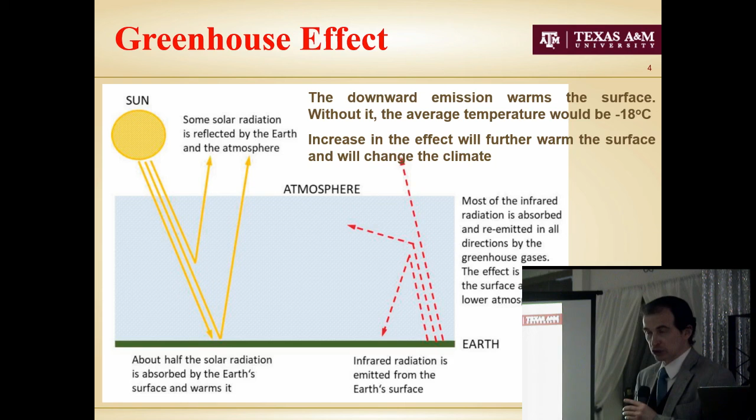Let me begin with the definition of global warming and global challenge. It turns out that global warming and greenhouse effects do have a positive effect on all of us. We wouldn't be able to survive on this planet, at least not comfortably, if the effect weren't present. So we're certainly thankful for that, and not being at minus 18 degrees C without it. At the same time, considering the population and energy demand, we won't be able to survive much longer if temperature is affected significantly.

That said, based on international agreements, and the Paris Agreement in particular, the plan is to try to limit the increase in greenhouse gas emissions and temperature effects, staying below 2 degrees C, maybe at about 1.5 degrees C, and take it as a challenge to look at technologies that might deliver on that promise in the short term, not in the next 100 years, but sooner.

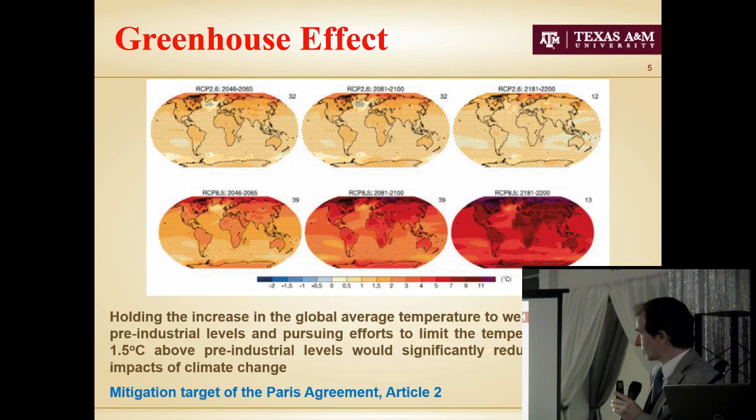That brings consideration of conventional approaches, and that brings nuclear into the picture. There are a couple of things to be said about nuclear and greenhouse gas emissions. Certainly it has promise, and it has some challenges to be addressed, which is why people consider next generation nuclear reactors.

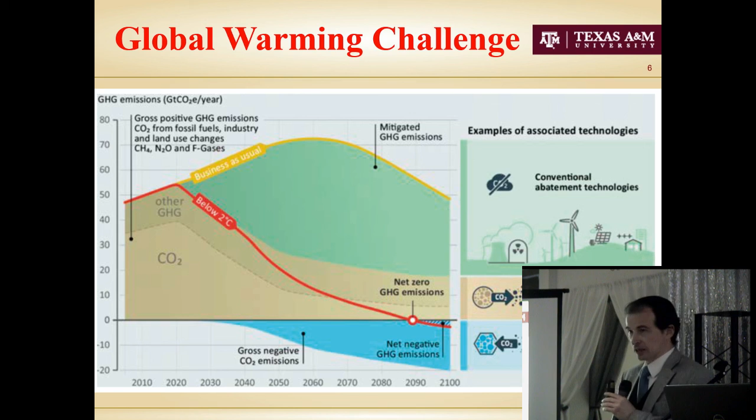There are emerging carbon removal technologies of various kinds, with the idea that a combination of emerging energy technologies and nuclear, still new - we haven't been around for centuries, but already not that new anymore - can help. Properly operating nuclear power plants don't release much, or shouldn't be releasing much, into the atmosphere.

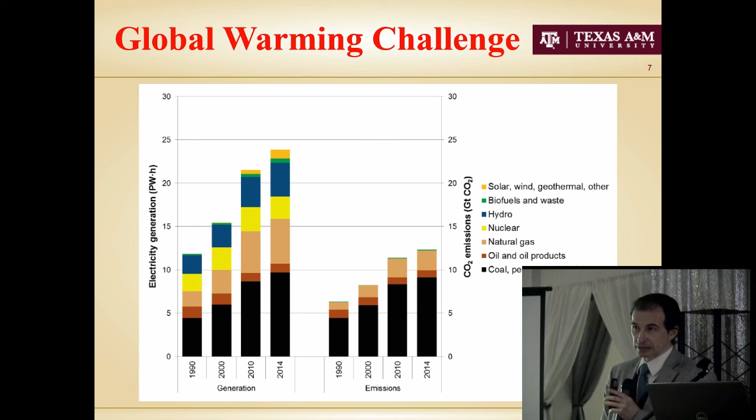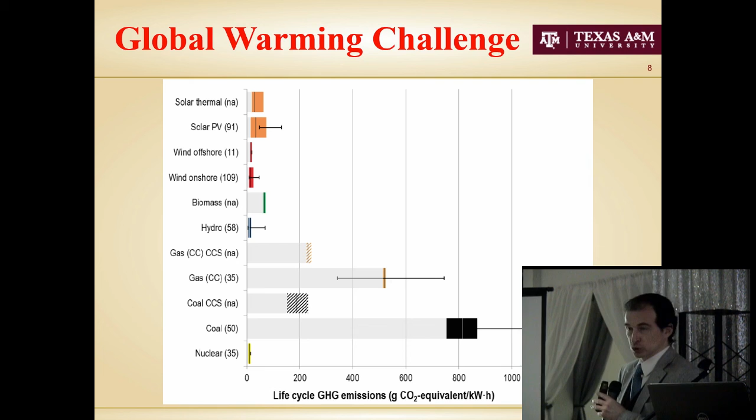That said, I looked at what the actual numbers are like, and indeed nuclear does come across - and I'll talk a little more skeptically about this in the next slides - as a rather clean and environmentally benign technology. That's what originally brought me to nuclear a while back, looking at advanced energy sources that can run sustainably without much need for anything else for it to run.

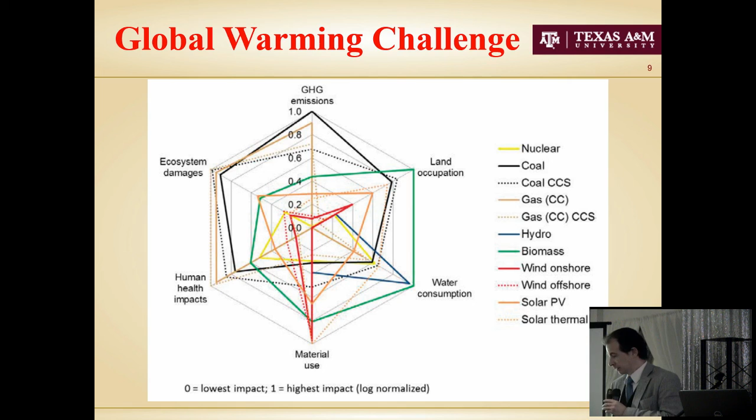When we compare human health effects, land and water consumption, and ecosystem damages, a properly operating nuclear power plant comes across as very, very attractive in that case. It comes nearly completely benign in terms of what it's emitting and what it requires for operation.

That said, in the middle, the nuclear power plant itself doesn't emit greenhouse gases, and it takes work to manufacture fuel for a nuclear reactor. After the fuel spends time in the reactor and produces energy, and we get electricity out of it, certainly those components do contribute greenhouse gases, because most of those systems are designed with conventional resources and conventional technology, and most were designed 20, 30, maybe 40 years ago. That's part of the consideration behind next generation nuclear power plants and their next generation interactions with the environment - they don't look quite like what plants look like today.

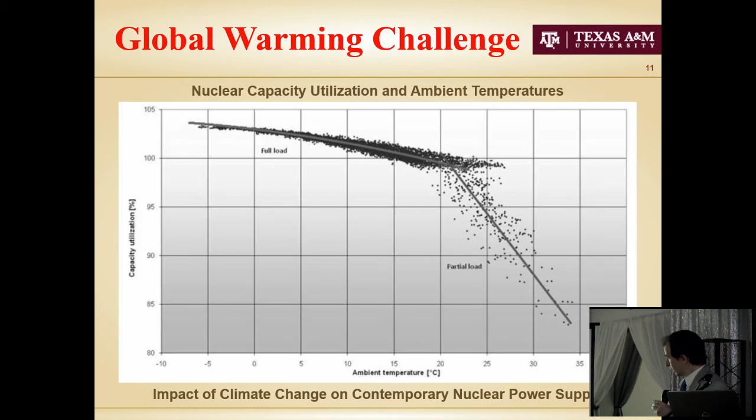It's possible and conceivable that a nuclear power plant designed relying on an aquatic system may, in the long run, with environmental conditions changing, end up in desert conditions and not be able to reject heat the way the plant was originally designed. So that's certainly something to consider, and it's a factor in designing plants.

We can make it environmentally friendly, environmentally benign. We can address challenges like traces of greenhouse gas emissions and the nuclear industry's reliance on aquatic systems for heat rejection. The second one, fusion, is still trying to catch up - it's certainly not yet in the engineering domain, and I'll come back to that in a few slides.

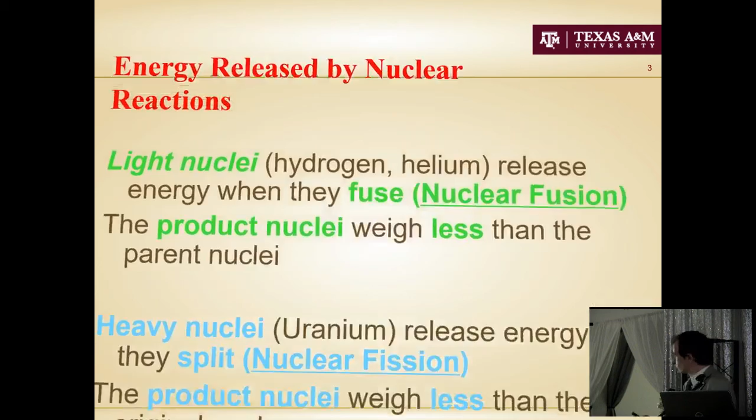I wasn't sure how familiar you guys are with nuclear power, but that's basically the general idea: you introduce elementary nuclear particles, make heavy nuclides split apart, and that fortunately produces a quite large amount of nuclear energy. The advantage is it's a high energy density power source, and as a result it can be very, very compact.

Also, because there is no oxygen consumption, it's completely autonomous. If I know how to control it, I certainly can design a system entirely autonomous to the environment, and that's what makes it quite applicable for space applications, for example.

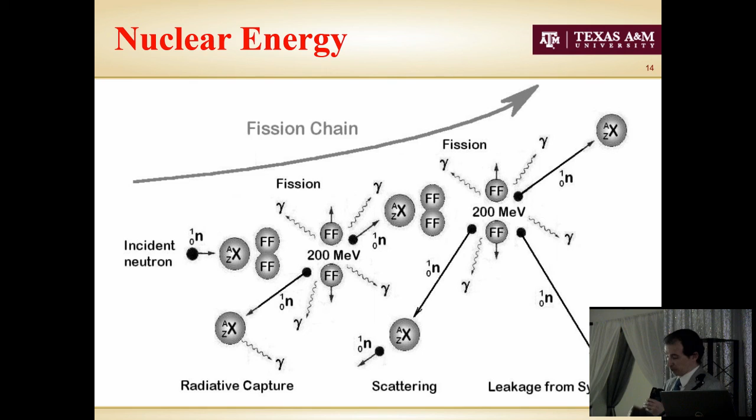We come up with nuclear energy as a very advanced energy - there hasn't been anything like it in past centuries. At the same time, charged particles produced in nuclear reactions do carry electricity directly. They can be harvested, but it's difficult, and we don't do that. That would be very efficient, but engineering is difficult.

We also might be able to take advantage of secondary effects that happen after we split the nucleus, and we also don't do that for exactly the same reason - it's difficult engineering, I wouldn't say prohibitive, but we're just not there yet. It requires more materials research.

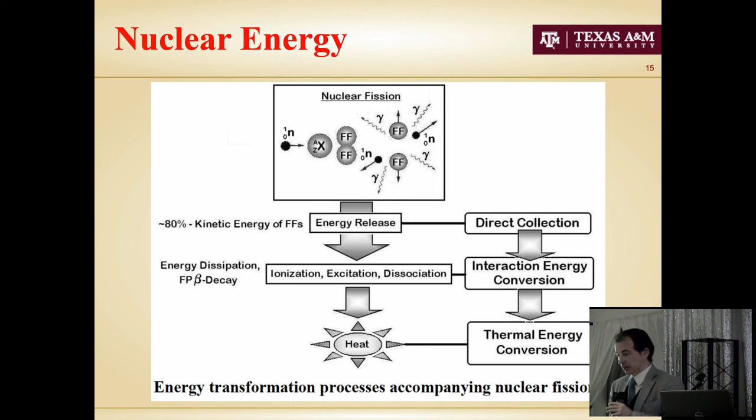So what we figured out to do reliably, and everybody does it, is take advantage of the heat of energy generation coming from nuclear, and then use that heat as a conventional heat source. As such it works pretty well, but like any thermal energy heat source, it's limited by Carnot efficiency. It requires heat rejection systems, and current power plants, about 30% efficient, need to reject a significant amount into the environment.

And even so, we're not releasing greenhouse gases, but we are certainly thermal polluters in terms of effects on the environment. But the advantages again are a high density energy source, autonomous energy source, providing quite significant amount of energy from a very small amount of fuel. It's not a chemical reaction, it doesn't require oxygen for operation, and can operate for a very long time without refueling.

As an example, research reactors - Texas A&M has 2 of them - run on the same fuel for a very long time. We have one megawatt reactor that runs for about 40 years on the same fuel. We also have a 5-watt reactor, a small one, that will never run out of fuel. Even though the power output is very small, it's remarkable that the system will always operate for a considerable amount of time without any requirement to resupply fuel.

So that's pretty unique. Certainly because of the autonomy of operation, not needing oxygen or anything else except fuel, that's quite attractive. From an engineering standpoint, it's a highly regulated industry. We certainly felt the accidents that occurred at 3 Mile Island, Chernobyl, and Fukushima most recently. We learn from accidents like every other industry, and we certainly would like to make sure this is not going to happen again, at least not the way it already happened.

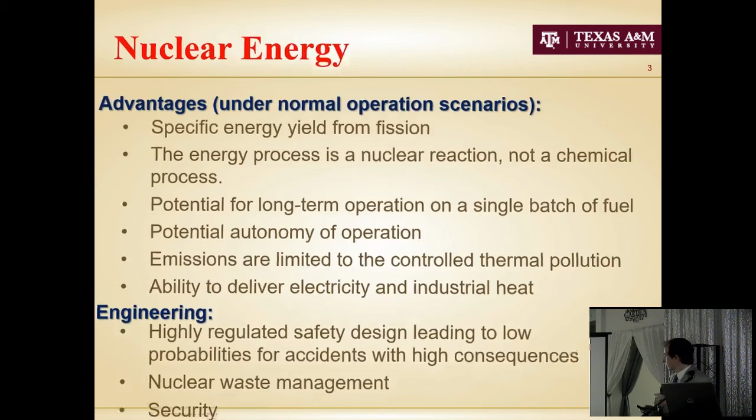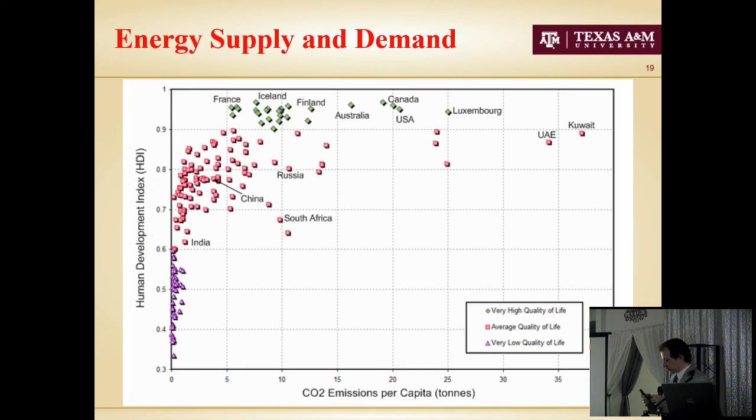Population is growing, and energy demand is growing, and as a result, we do see nuclear as one of the potential solutions in the energy mix. Certainly not by itself alone, but as part of an energy mix, it certainly looks quite helpful.

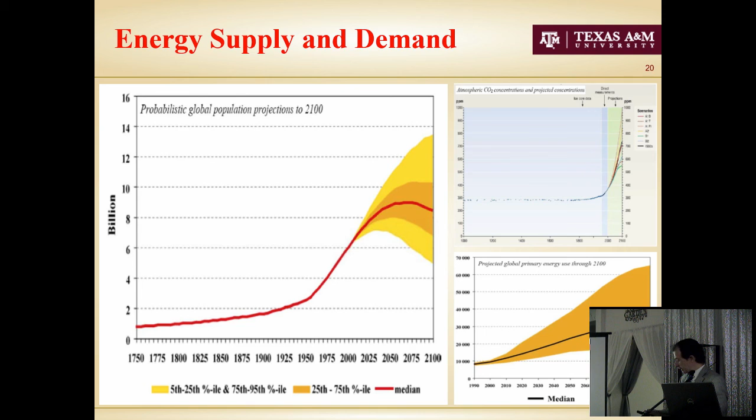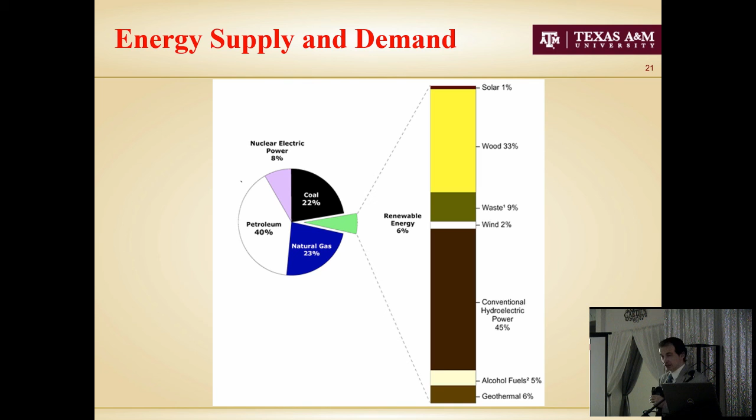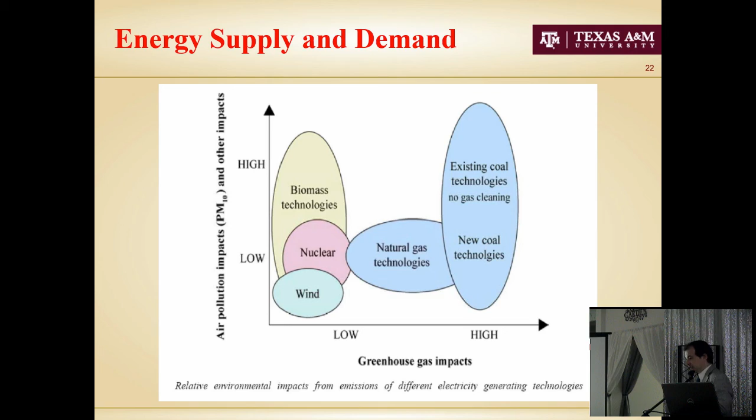If we look at the energy breakdown, nuclear worldwide is about 8%, roughly, depending on the literature source, reference source, about 8% globally. And it's certainly supplemented by renewables, which would allow minimizing emissions, and we are on the cleaner side. Even with those disclaimers, we certainly are on a dramatically cleaner side compared to alternative, conventional energy sources.

The second component, and that's why I want to finish this talk on the sustainability aspect a little later, is about how much fuel we actually have. Before my time, people were quite worried about running out of fossil fuel, conventional fuel resources. Knowing how much fuel is required to sustain nuclear power is an important consideration, because you don't want to have an energy source like this and then 200 years from now declare there's no more fuel for nuclear power plants. It's certainly a commitment for a very long time.

So according to estimates, and they're just estimates, for conventional nuclear power, cheap fuel resources are certainly limited. As we move to next generation power plant and reactor designs, the numbers grow dramatically, going into thousands of years. We essentially become a sustainable energy source at that point. Nuclear is one of the unique energy sources, being non-renewable in principle, but capable of producing fuel for itself, and while producing fuel for itself, also taking care of nuclear waste, because what we consider nuclear waste today actually would become sustainable nuclear fuel in the future.

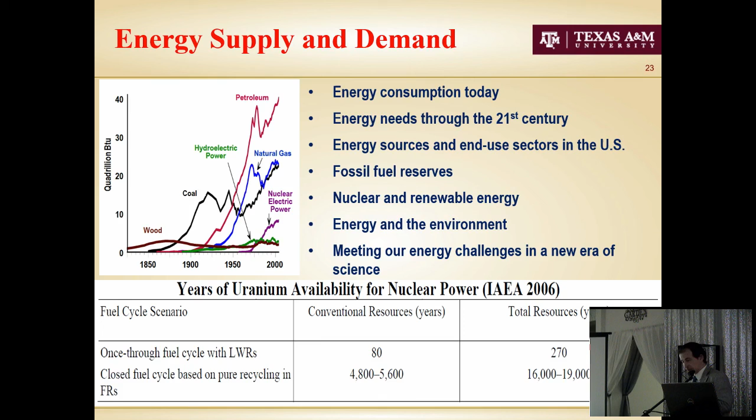So focusing on nuclear power, and again making our way slowly towards Generation 4 systems and talking about those. I already mentioned basic advantages, probably four of them worth mentioning most of the time. A properly designed nuclear power plant is environmentally friendly. Certainly from an energy independence and national security standpoint, it's quite an attractive energy source, and there's resource availability there. I just showed you the numbers, but there are concerns about proliferation, safety, and waste management, considerations meant to be addressed by next generation, what we call Generation 4, systems.

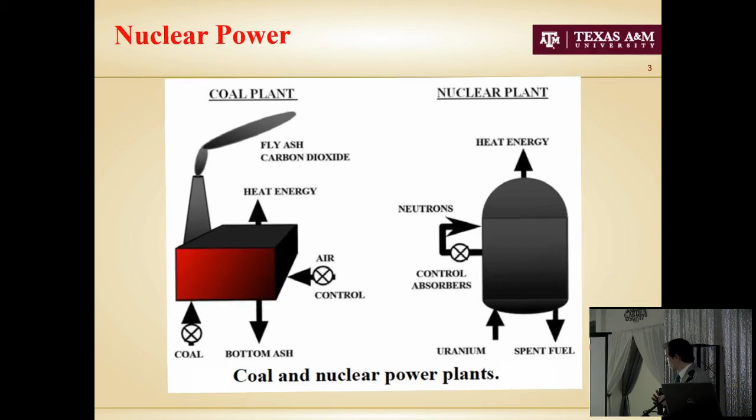To emphasize autonomy, I thought I'd compare a coal plant and a nuclear plant. From the nuclear side, we can run without refueling for quite some time. The current idea is to design nuclear reactors for applications that wouldn't require, or wouldn't be in a condition to receive, supply, wouldn't need a lot of maintenance, but would be able to provide energy autonomously. You need a little bit of uranium, and you'll eventually produce spent fuel as you use that uranium and get energy out of it. But besides heat and electricity, there isn't much else that's needed or emitted by that plant.

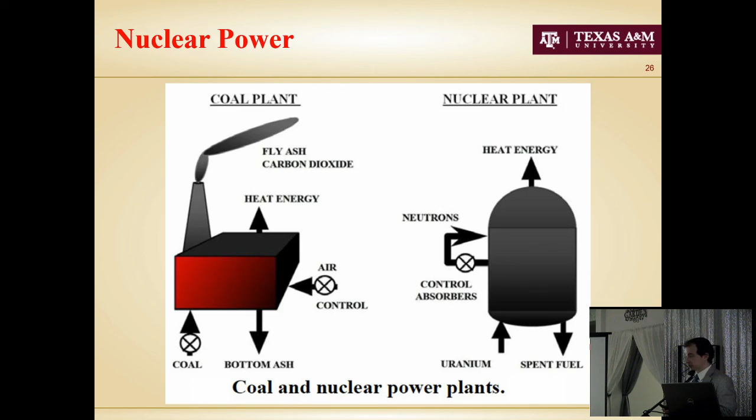Looking at the numbers, at how many nuclear power plants and reactors we have globally, it looks pretty interesting. Being a young industry, a very complex industry, we like these numbers. We like to recognize that we have 450 units in operation globally. That's 11% of all electricity from an energy source like this. It's certainly quite remarkable.

Domestically, we have 98 units at this point. There are a couple of units shut down for a variety of reasons, economics at this point—it's a subject for a different talk—but we're still producing 20% of domestic electricity, and we do have 2 new builds coming up, which is good news for the nuclear industry. Outside, nuclear is quite popular: there are 61 units under construction and 149 planned, mostly in the Middle East and Asia.

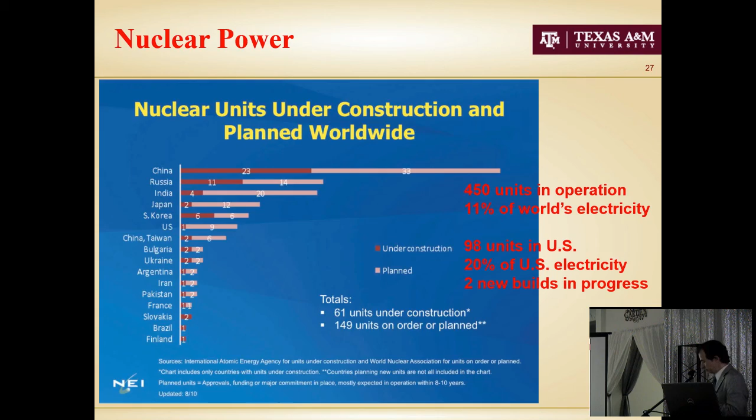Out of that, 2 kinds of reactors emerged. One that can boil water in itself and can run without a steam generator. And the second one, which is more popular today, needs a steam generator to produce steam and ultimately produce electricity. Those are boiling water reactors and what we call pressurized water reactors.

Canadians, because they didn't want what we call a fuel cycle and produce fuel with high content of certain nuclides, decided to go with a natural composition, and they came up with what they call the CANDU reactor. The CANDU reactor runs on natural composition of uranium. That reactor would be a third kind because it uses heavy water compared to light water.

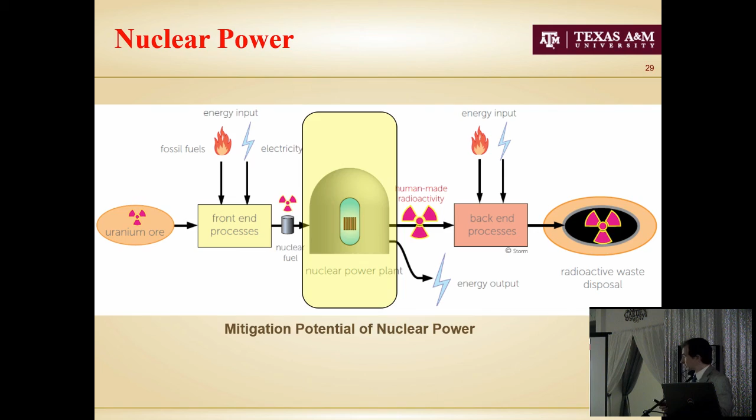Trying to address what I showed before, trying to address the rest of the fuel cycle, make sure there is no nuclear waste outside of the nuclear power plant, and the power plant takes care of that automatically. So the goals for Generation 4 systems: sustainability is one, and sustainability includes environmental aspects to that. It's assumed that a nuclear reactor would be capable of taking care of nuclear waste.

Safety and reliability, economics, security and proliferation resistance, making sure that the reactor is, by design, secure, and we don't need to worry about either safety or security of the system. So those are the goals behind thinking that we need to go beyond what current technology actually represents.

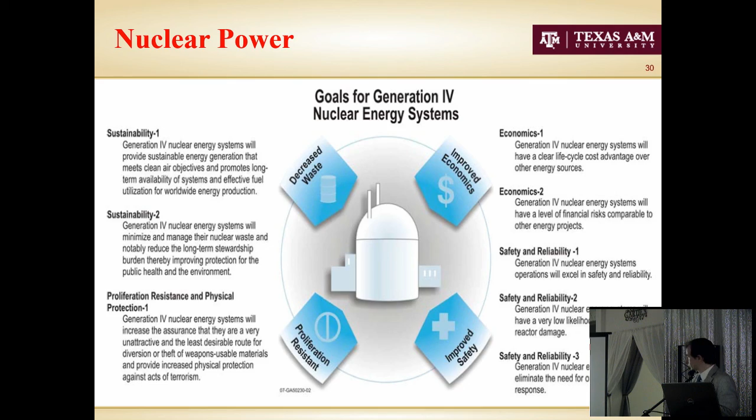Gen 4 systems comprise 6 different reactor technologies. Every one of them has a commercial vendor pursuing the technology. Most of them, what we call fast reactors, use high energy particles compared to thermal reactors that use low energy particles. So the gas fast reactor uses gas as a coolant, gas being helium.

The very high temperature reactor is a version of a gas reactor, but instead of high energy particles, it uses graphite, and the environment uses low energy particles as a result. But the coolant is still helium.

The third one is targeted by 2026, but realistically we're thinking it will come online by 2030 for the purposes of testing different materials. Then sodium obviously is not a very friendly material when it comes to interaction with atmosphere, with oxygen. So the reactor that doesn't have that issue uses liquid lead as a coolant.

The last one, grown to be most popular in the last 3 years, is the molten salt reactor. So all of these 5 reactors above molten salt reactors use solid fuel. They look like a conventional system with conventional solid components. As a result, situations that happened before when we talk about core melting accidents, core damage, and things like that, are certainly in theory possible. But the last one is essentially a bucket with liquid fuel.

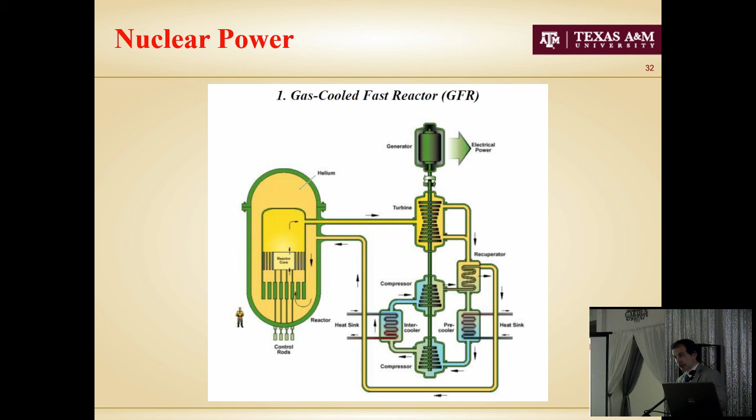It will produce process heat for a variety of applications. Traditionally, gas-cooled systems have been considered as energy sources for the petrochemical industry. And then, because it's a fast reactor, it would be designed to use high energy particles to take care of nuclear waste. So in theory, all of this fast reactor technology is capable of essentially taking care of nuclear waste by design, by itself.

The second one is a thermal version that uses low energy particles, the high temperature reactor that uses graphite and helium in combination. This one in particular started with the thinking that it would have a heat exchanger and would be designed to produce process heat for traditional process applications, for hydrogen production, for desalination, and other applications like that.

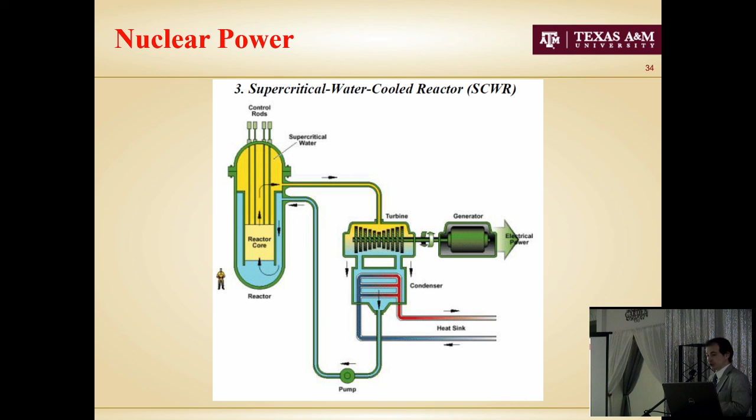And the supercritical water reactor is the only one that uses water and would look like a conventional Rankine cycle-based system with corresponding efficiency there.

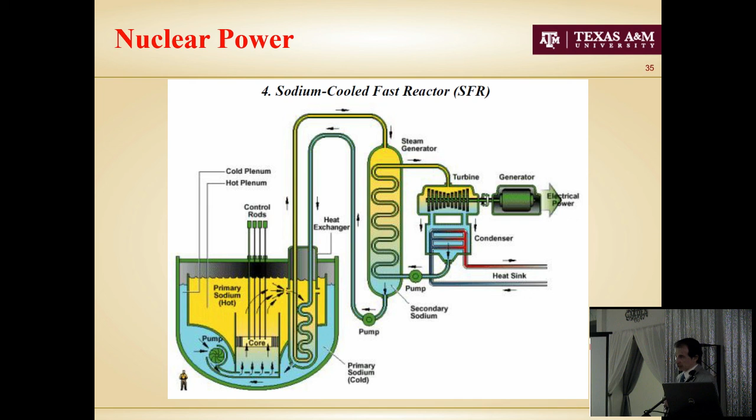Liquid sodium doesn't give us high enough temperatures for the Brayton cycle to be effective, so we assume it will use a heat exchanger with a conventional water cycle on the secondary side. Its cousin, the lead-cooled fast reactor, gets us to about 800 degrees C at the exit, so it has the possibility to transfer heat through an exchanger to a secondary working fluid, most likely helium, which would get us to the Brayton cycle again.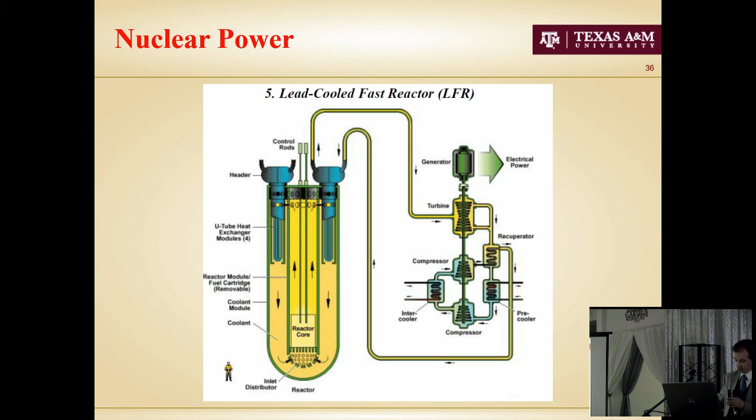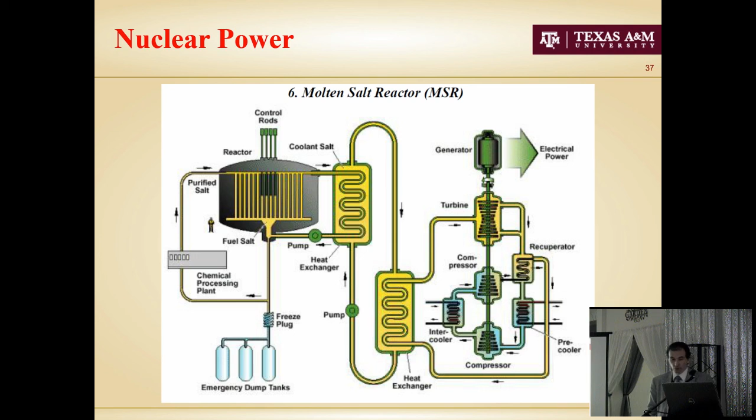The sixth system is closely designed based on the Oak Ridge design, where molten salt—either chloride or fluoride—would carry nuclear fuel and stay liquid, so that nuclear accidents involving significant damage to the core wouldn't be possible by design. This reactor would also be capable of using the Brayton cycle and achieving much higher efficiencies than current nuclear power plants.

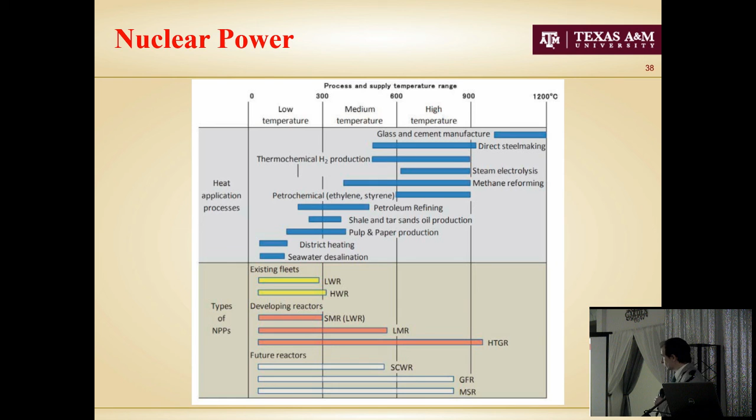Of course, current technologies—the existing fleets of light water reactors and heavy water reactors—do produce desalinated water, and there are plants with desalination units associated with them. As we move to developing reactors, small modular reactors more adaptable to the energy grid, and as we move to Gen 4 systems, we will move to higher and higher temperatures and more demanding process heat applications.

In the intermediate term, we believe gas-cooled units that utilize the Brayton cycle and are significantly more efficient than light water systems because of temperature would come in maybe 20 to 30 years. Then in the longer term, we would move to fast reactors and also start taking advantage of a second pass as far as fuel is concerned.

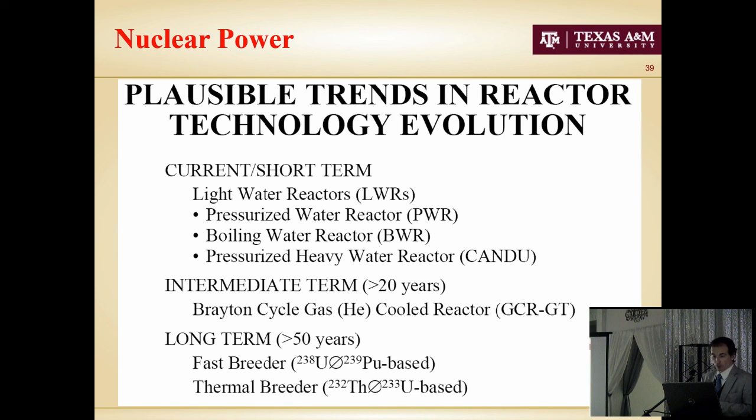So we can use uranium—there's an abundance of uranium resources—but certainly thorium, which is just about as abundant as uranium, if not more, can also be utilized. Thorium has been tried before; it has challenges, which is why people moved to uranium. But at the same time, both uranium systems and thorium systems are available and being considered.

A couple of areas make nuclear really essential as an energy source: navy carriers, civilian nuclear fleet, portable nuclear power for remote regions, reliable fuel supply chains, and deep space missions. In those directions, nuclear is very difficult to replace—there aren't very many alternatives.

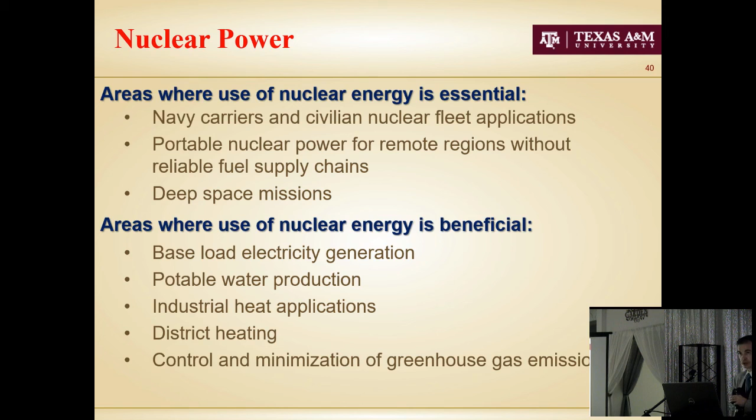On the other hand, from an environmental standpoint—looking at baseload electricity production, potable water, industrial heat, district heating, and minimization of greenhouse gases—certainly nuclear brings unique features that complement renewable energy supply.

Coming back to fusion, that would certainly be excellent, but unfortunately it's still decades away from engineering applications. The current timeline for fusion energy is to have a demonstration plant on the physics side of the machine within 20 to 30 years, going to the next generation European project funded by 15 countries. It's quite expensive, and that demonstration plant would have energy conversion associated with it, and then potentially commercialize one way or the other. So it's quite a long time.

Obviously, fission, the nuclear-based industry, is certainly not going to stay without evolving, and it's going to be a competition. We're going to see how this unfolds, but it's quite a while before fusion becomes viable.

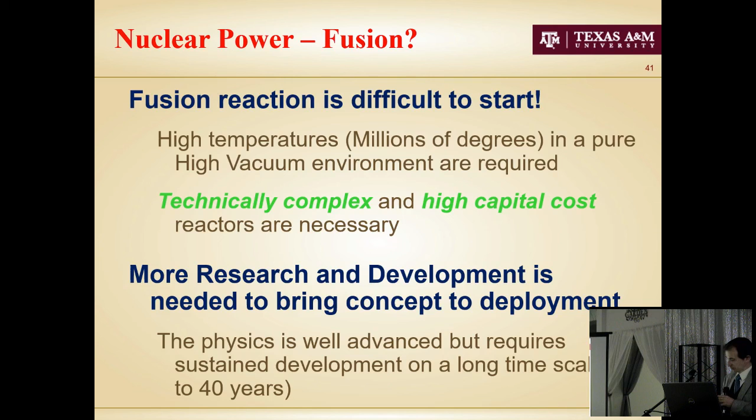The last aspect of consideration is sustainability, and how all these aspects of nuclear power come together. From a sustainability standpoint, the idea is fairly simple: to make sure we don't corrupt our planet, and that next generations can enjoy the same quality of life as past generations, on a sustainable basis. We would expect every generation to take that responsibly.

There are biophysical aspects to that, there are environmental aspects, there are many different considerations. We certainly have trustee relationships and obligations, and there are certainly precautions on what technologies and considerations become relevant.

Thinking of nuclear, it's very difficult anywhere in the world to convince people that nuclear waste needs to be buried and that there should be a nuclear waste site, because eventually somebody will be living for millions of years next to it. It's not a big site—about 70,000 metric tons today—but still, somebody will be living next to it.

But there is an alternative. You can take advantage of the fact that it's still fuel, and if it comes back to the reactor, then the system becomes sustainable and the issue goes away.

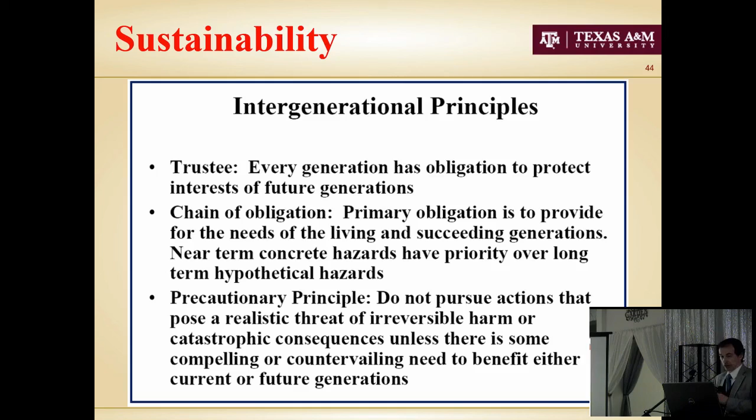At the same time, affordability of clean energy and having a baseload conventional efficient energy source that is reasonably inexpensive, aside from the financial burden to produce contemporary nuclear power plants, is certainly quite attractive for limiting and controlling environmental effects. Big energy questions about reduction of emissions certainly would have to be addressed. Use of water and environmental conditions where nuclear power plants would be constructed and operating are certainly a consideration.

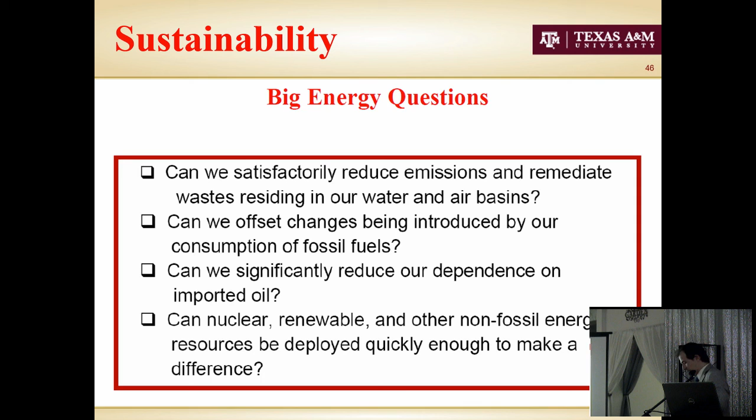Consumption of other fuel resources as part of the industry certainly would have to be balanced. It's intermittent, but renewables do complement nuclear power, and there are scenarios when they work together quite well.

From a nuclear technology side, when we look at sustainability, we consider three aspects together: society and effects on society, ecology, and economy. We base those considerations on economics, waste, safety, and security of the nuclear industry.

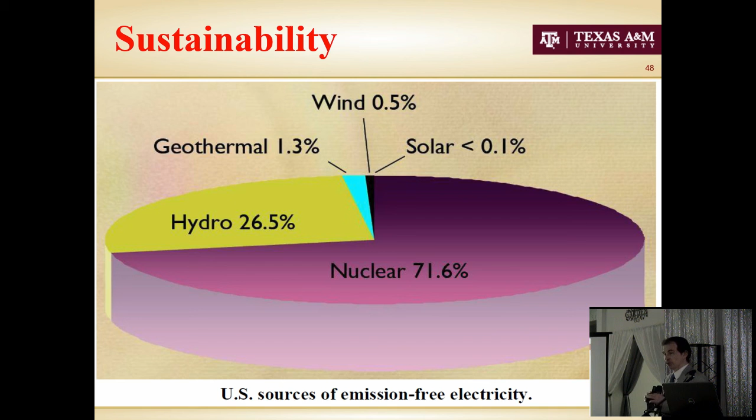And if we count emission-free electricity in that mix, nuclear looks pretty good. It gives 70% of emission-free electricity if we focus on just nuclear power plants. Coming back to uranium and fuel resources in general, how much fuel would we have? Generally, it's a sustainable energy source, even though it's not renewable.

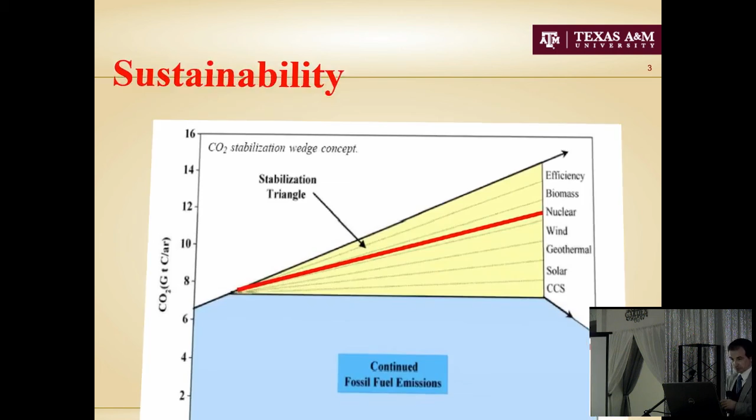This slide in particular gives an idea that with nuclear, it won't be possible to completely eliminate the climate change challenge, but at the same time, the energy source is efficient and explored well enough to make substantial changes and impact on emissions, getting toward the 1.5 degree C goal for temperature change in the overall mix. Vendors understand that.

Vendors are moving into advanced technologies. This is General Electric's direction. Generation 3 is the current fleet, a boiling water reactor. They moved to an evolutionary design, the economical and simplified boiling water reactor, which also uses water. This would be Generation 3 Plus, and they also look at small modular reactor versions of that.

And of course, they have the Generation 4 advanced fast reactor. This would be the reactor expected to be built as a prototype by either 2026 or 2030, depending on how on-time they are. They are pretty optimistic in that regard.

Westinghouse is pursuing lead-cooled technology, so we have two vendors that traditionally look at different configurations of advanced systems. It's interesting that General Electric is pursuing sodium-cooled systems and is the lead vendor domestically to pursue that type of reactor. At the same time, Westinghouse is not far behind, because the last operating sodium fast reactor, the Fast Flux Test Facility, was constructed by Westinghouse.

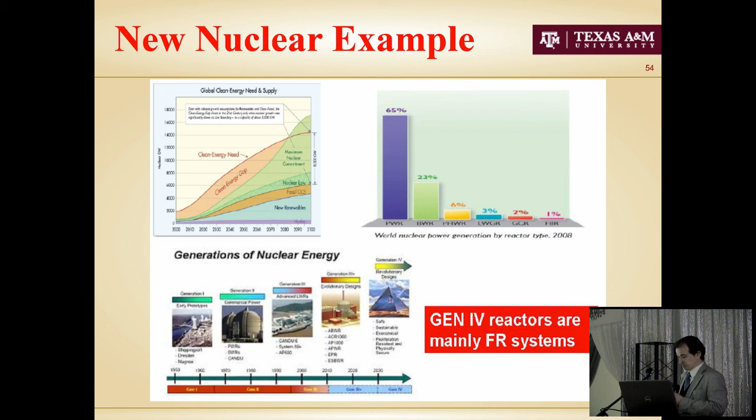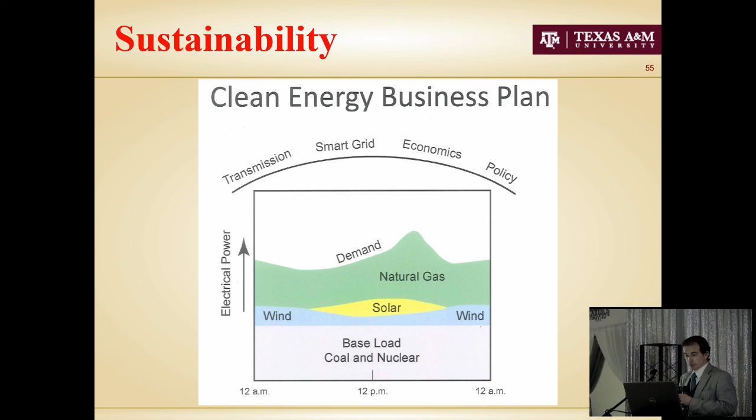And then we're looking also at energy mix scenarios, when we would look at a combination of solar, nuclear, natural gas, and coal working together. Nuclear is traditionally considered a base load source because reactors prefer to run continuously rather than responding to energy grid fluctuations. Not necessarily, but that's the traditional way of doing things. It's certainly possible to match that with both solar and wind power when peak demands actually occur.

With that, that's the conclusion. I hope it wasn't too fast, and I'd be happy to discuss all of these topics and answer questions.

So I'm going to recruit a granddaughter here. Linda, both of you stand up. I'm going to show you off. Okay, we have two granddaughters visiting with us, Linda and Sasha. They were both born in Kazakhstan, a Russian-speaking country. When they moved to New Zealand, Linda was 2.5 and Sasha was 7 months. So Linda, if someone has a question, give the mic to them and then just wait for the next person.

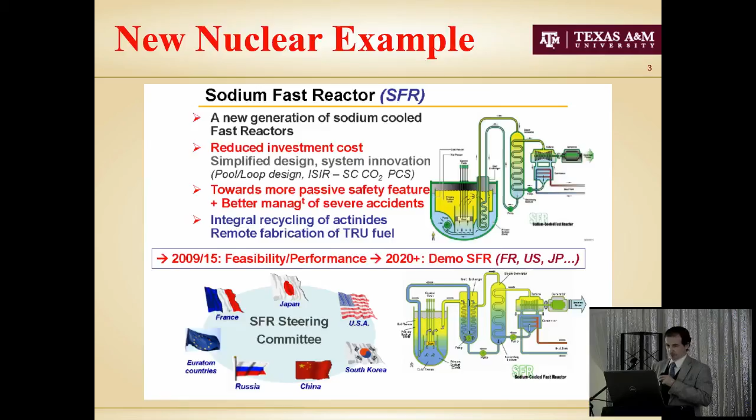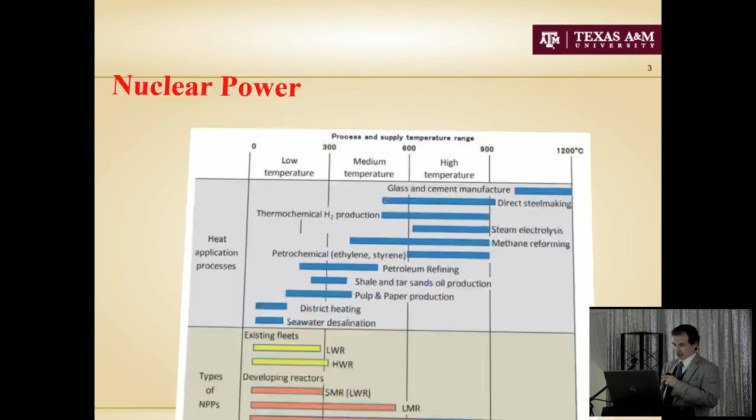Can you talk to what makes these new reactor designs safer compared to the old designs, from a meltdown perspective? Sure, let me go back to the list of reactors. I will stop as soon as I find a representative slide. So we do consider them safer, and for a couple of good reasons. Let me go to the list of reactors. I talked a little bit about that when we discussed molten salt reactors.

A molten salt reactor is essentially a tank made of stainless steel filled with molten salt, with a heat exchanger introduced to get heat out of the core. That's basically the design, and as such, it's not pressurized — it doesn't carry internal energy. Because the fuel is already in liquid form, it allows you, as long as the molten salt is not boiling — and the boiling temperature is very high, it's not expected to boil under any conceivable conditions — to dissipate heat much faster. That makes the reactor inherently safe from our perspective.